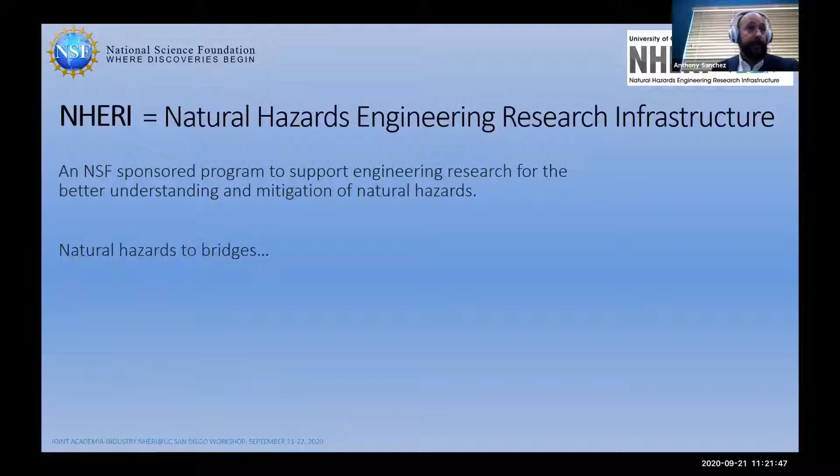What immediately popped into my head was Maurice White. I don't know if many of you know who Maurice White was, but he did some incredible work in the 1970s related to natural hazards. He was with this group called - here he is with his research assistants - he was with this group called Earth, Wind, and Fire, of course. One of my favorite groups. That's meant to be a joke - I understand many of you are probably laughing right now, so that's great.

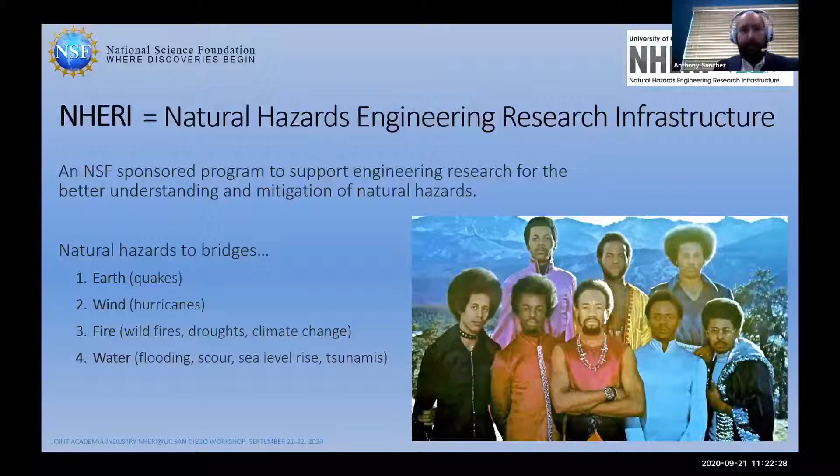I'm going to cover those natural hazards - earth, wind, going to skip fire, but then move along to water. Before we get to the natural hazards, I wanted to talk about the state of the art of bridge engineering technologies to lay the foundation for the talk, starting at the most basic level with the structural forms.

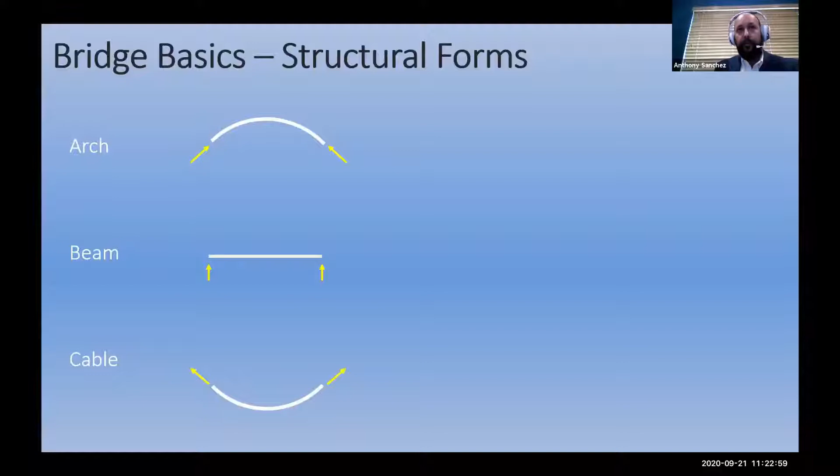In bridge engineering, we use three main structural forms: arches, beams, and cables. These three forms exist in nature - there's an arch, there's a beam, there's a cable. They've also been used for thousands of years by bridge builders, going back to Roman times.

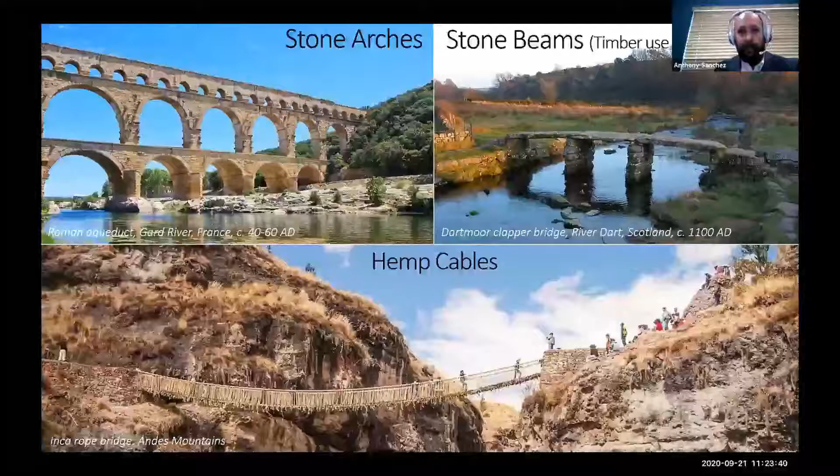There's a Roman aqueduct in France that's still standing today, 2,000 years old. There's a 900-year-old beam bridge in Scotland, a very rudimentary bridge, but it basically exemplifies the form we still use today. And then, of course, the Incas in the Andes have been designing and building cable bridges for millennia.

So let's fast forward about 1,000 years into present times, from about 1970 to present day. I call this the technological revolution of bridge engineering. Advanced computer analysis, high-strength materials, and advanced construction methods have allowed us to design structures like you see here - this is the Millau Viaduct in France, which opened in 2004.

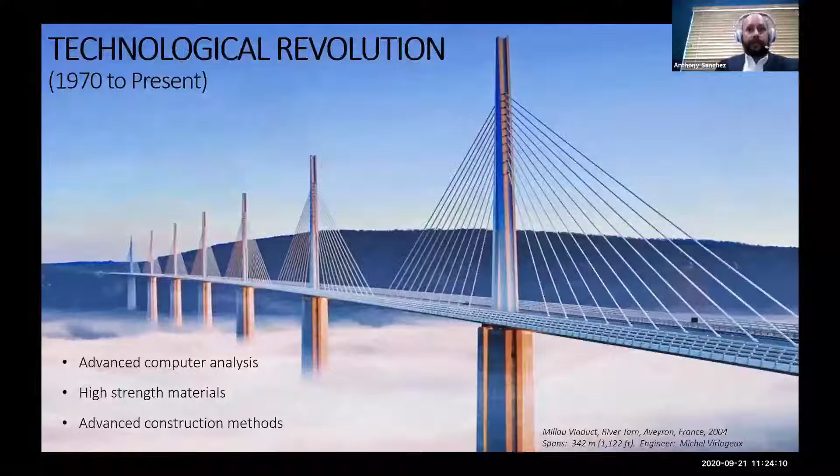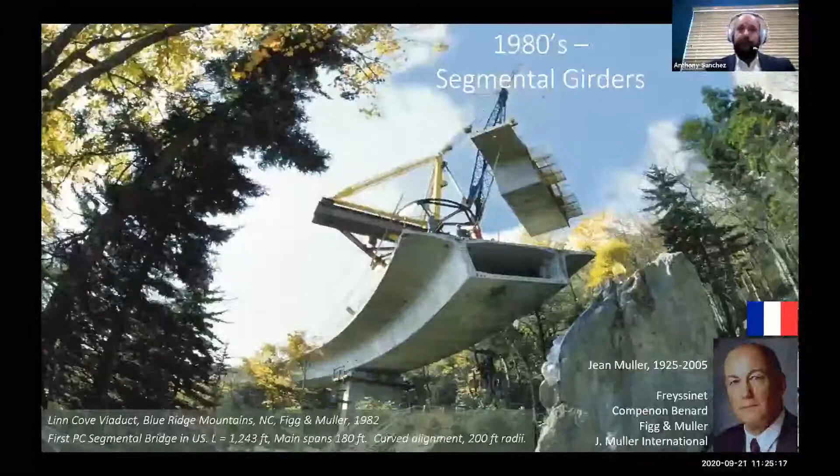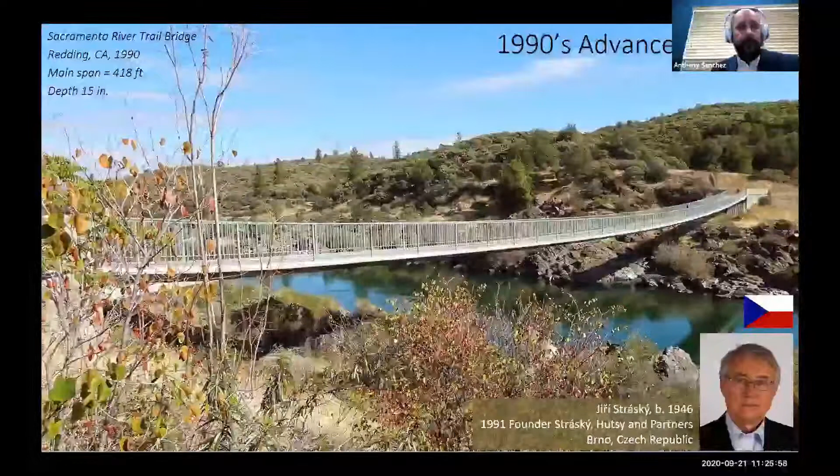That's possible because it works as a cable - it's basically a very flat suspension bridge with the suspension cables embedded in concrete, so you're walking directly on top of the suspension cables. This form was first used in Switzerland in 1967, and then there were a few examples built in Germany.

The stress ribbon bridge was really perfected in the Czech Republic by Jiří Stráský. He's been involved with more than half of the stress ribbon bridges built across the world, in Europe, Japan, USA, Canada, and elsewhere. This one was the first built in North America, in Redding, California, over the Sacramento River. We built 3 of these in San Diego County, and I worked with Jiří on one in San Diego.

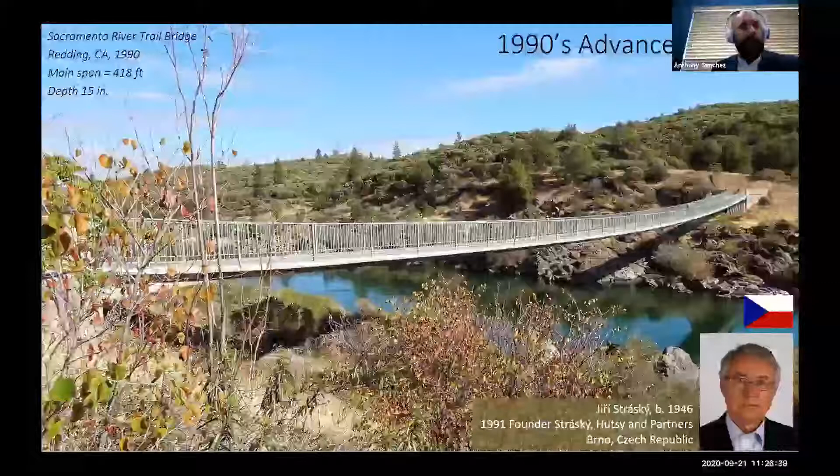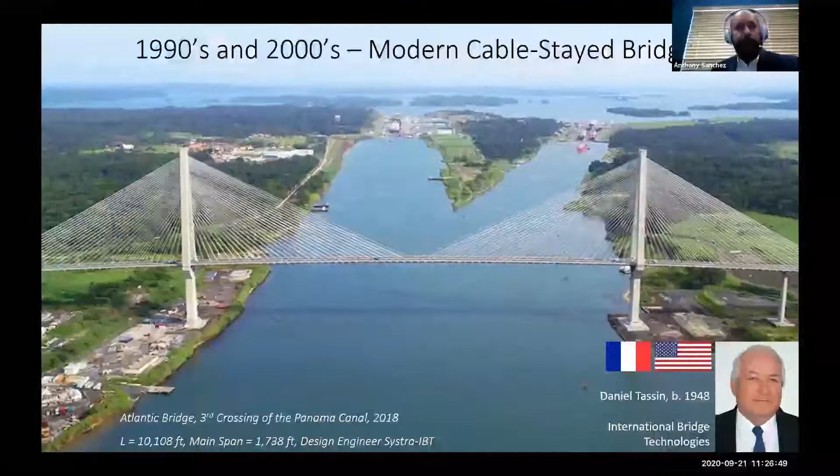Moving on to long span bridges, this is the state of the art as of today for spans up to about 3,000 feet: the cable stay bridge. This happens to be the longest concrete span in the world, with a span of over 1,700 feet between towers. It just opened 2 years ago, as the 3rd crossing of the Panama Canal on the Atlantic side. It was actually designed in San Diego by the firm International Bridge Technologies. There's a picture of Daniel Tassin, who's the chief technical officer of our firm.

Coming back to the US, here's a pretty big arch, a concrete arch over the Colorado River, right next to the Hoover Dam. This one opened in 2010. It's a spandrel arch, which has been used for almost 100 years. The notable feature here is the way it was constructed with advanced construction technology.

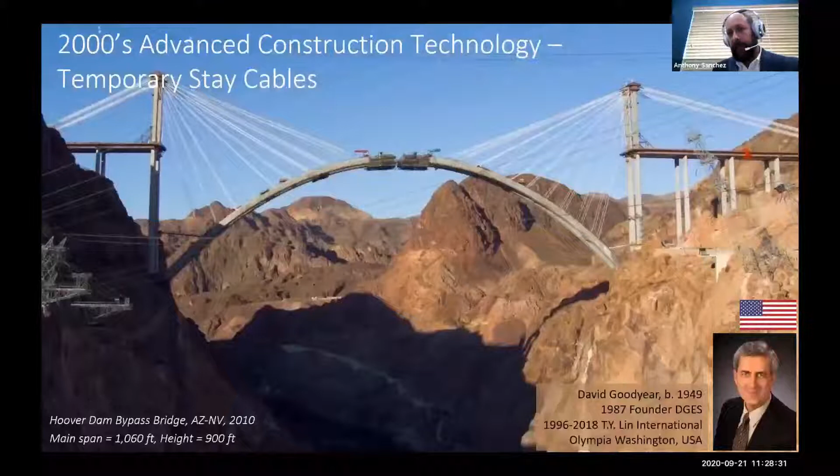Instead of trying to build a support system underneath for the concrete, we designed it so that it can be temporarily suspended from stay cables until the arch was closed at the crown. You can see here they're building the last couple of segments right before they close the arch, and then all those temporary stays can be removed. So construction technology is key - how to build the bridge at sites like this is paramount. This one was designed by T.Y. Lin International, with David Goodyear leading the effort.

I teach the bridge class at UC San Diego, and I like to show this slide to my students. It's a good example of the historical development of long span bridge technology spanning 3 centuries. This is a site in Scotland over the Forth River. That first bridge, the red one in the foreground, was built in 1890. That was state of the art back then - it was actually a world record for several years, the longest span in the world.

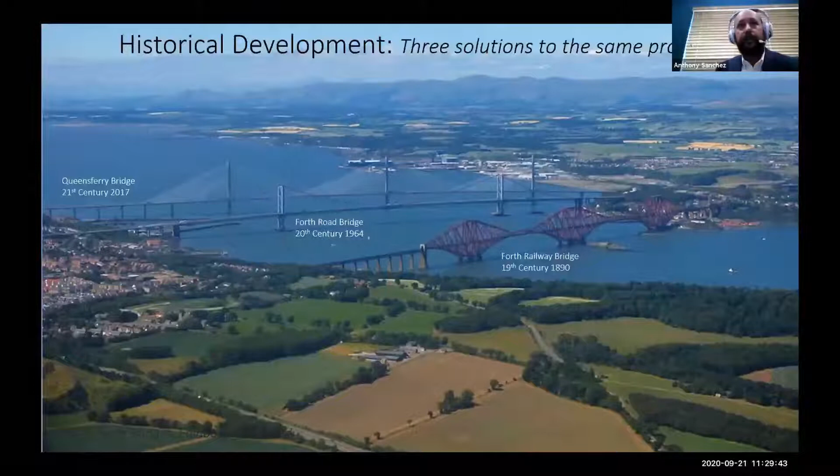About 75 years later, the second crossing was built using 1960s technology, 20th century technology. It's a completely different bridge type - instead of a cantilever or steel truss, it's a suspension bridge using a suspension cable as the main supporting element. Then in 2017, there was a third crossing, this time using the best technology available at the time, once again a cable stay bridge, which is the current state of the art, state of the practice.

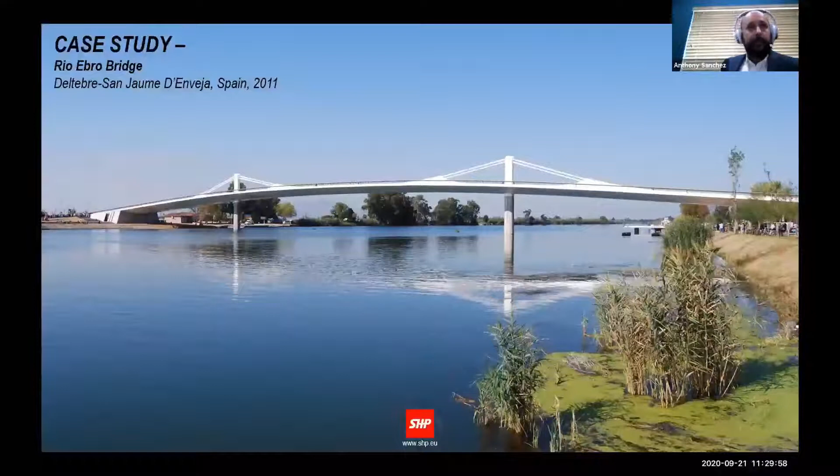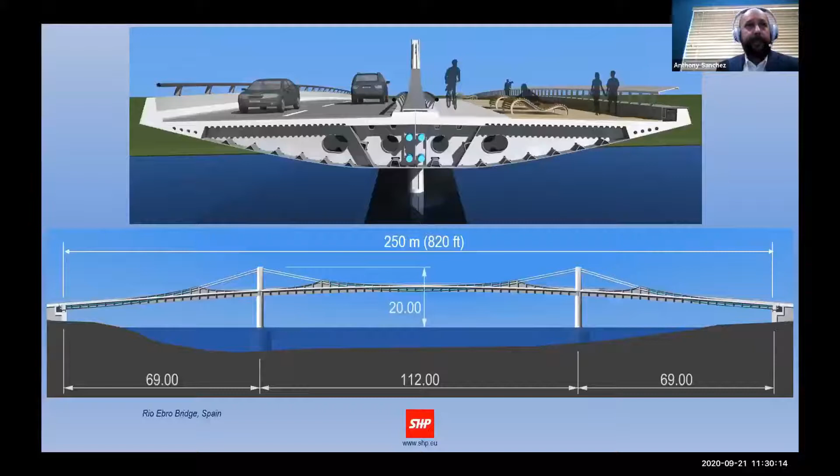Now I'd like to go to Spain and show a few slides on the Rio Ebro Bridge, which opened in 2011. This one is designed by the firm of Stráský, Hutsy and Partners. It's modest in size, 820 feet from abutment to abutment, but it's a very elegant, very sophisticated and technologically advanced design using a steel orthotropic deck to keep the deck very light. The entire bridge is supported by these 4 cables right down the center of the bridge. You can see how they attach and suspend the main span.

Instead of anchoring these cables into the ground as a traditional suspension bridge would do in a heavy concrete anchorage, the main cables are anchored to the deck itself. It's a self-anchored system. So you see how those 4 tendons anchor into the ends of the bridge, and that horizontal force is resisted by compression in the deck.

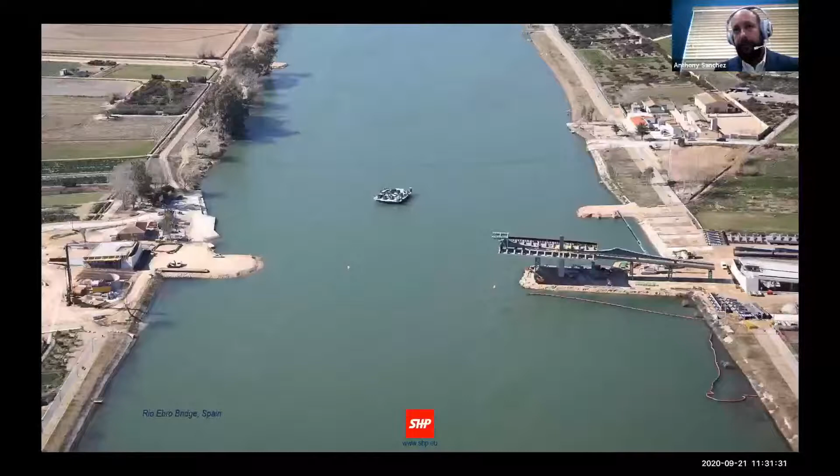For any given site, it's important to understand the feasible ways to build a bridge, and the bridge designer really needs to understand construction to come up with a cost-effective bridge design that can be built cost-effectively. Many times bridge engineers will be working with a contractor to figure out the most economical way to bridge the site. For this particular example, the 2 ends of the bridge, the approach spans and cantilevers, were built with temporary supports on each side of the river.

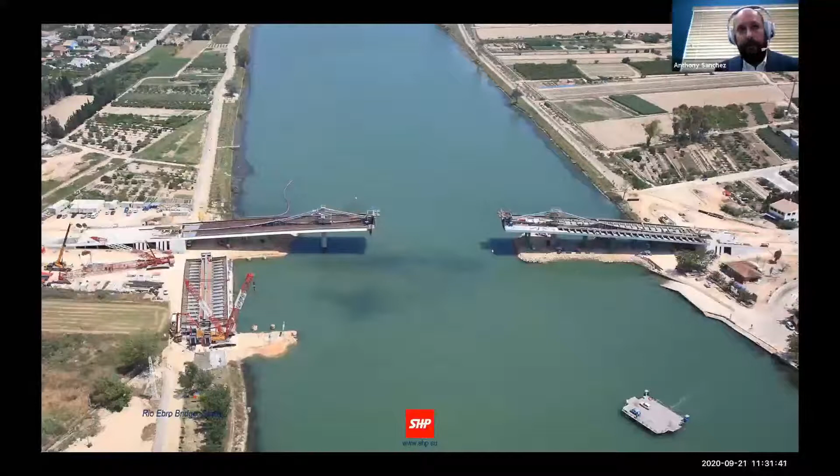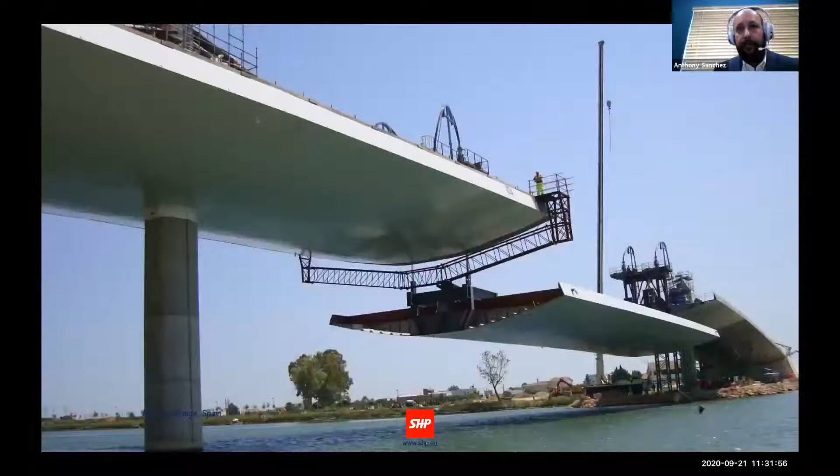You can see the temporary islands that were constructed there. Once the 2 cantilevers were complete, the middle portion of the central span was fabricated and put into the water. It's basically a boat shape, so it floats, and was pushed into location and then pulled up on winches from the 2 cantilevers of the bridge, then spliced, and then the central post-tensioning tendons, the main cables, were tensioned to complete the bridge.

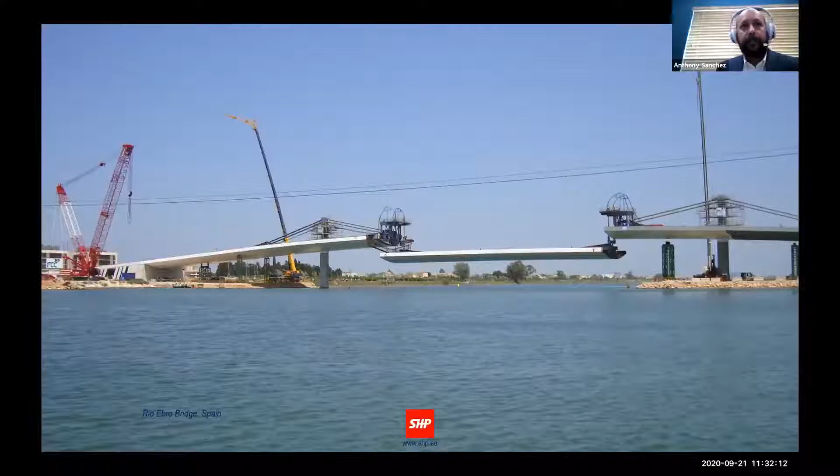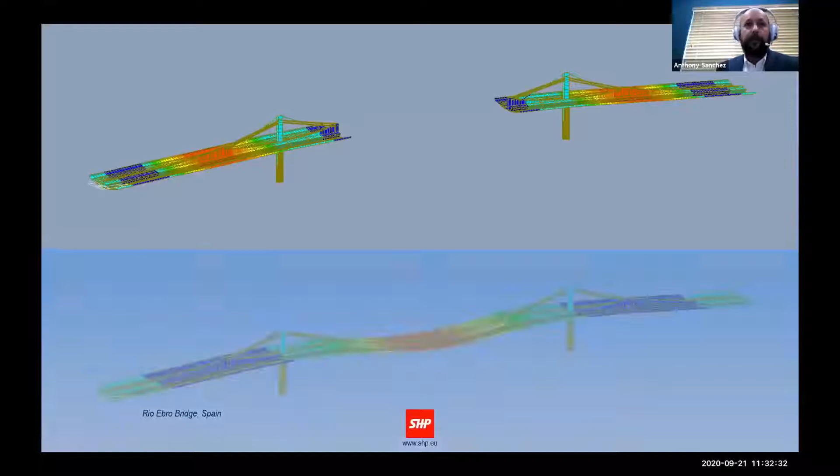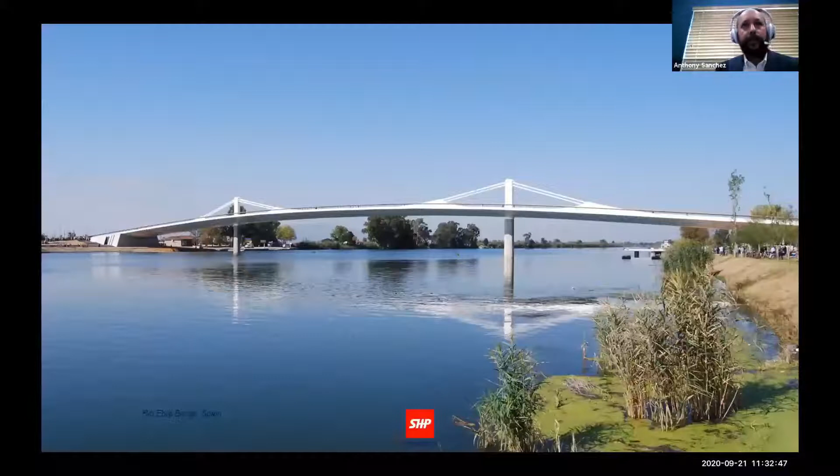As the engineers designing this bridge, we need to develop a good model that captures all the stages of construction, so we're certain they'll all work. Then the completed stage, capturing any locked-in effects from staged construction, and applying all the live loads and other loads that will affect the bridge during its service life, resulting in a completed structure, a very elegant bridge that showcases the state of the practice and technology we have available today.

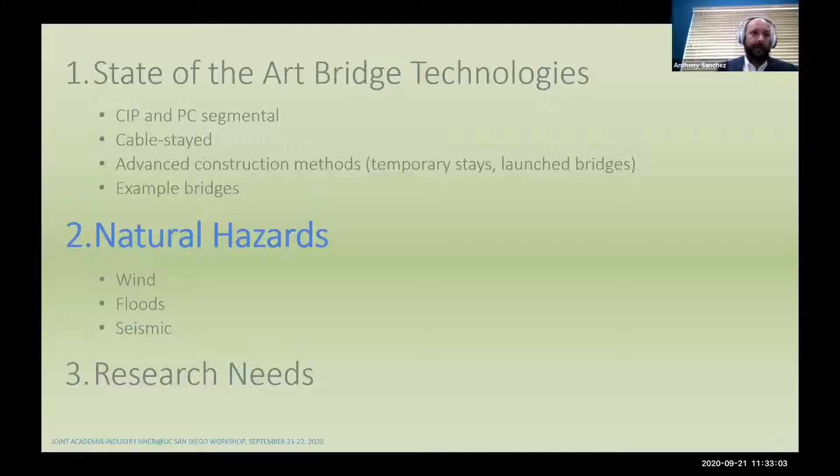Let's move into the second topic, which is natural hazards. That's what this workshop is all about. I'm going to cover wind, floods, and last but not least, seismic.

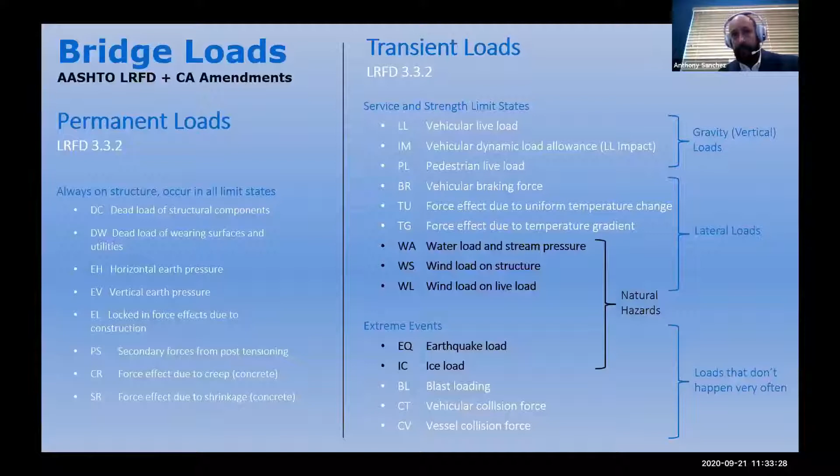In the US, we design our bridges based on the AASHTO LRFD code. Here's a listing of the different loads we design for. Highlighted in black are the loads from natural hazards, including water loads, stream pressure, wind loads, and earthquake loads.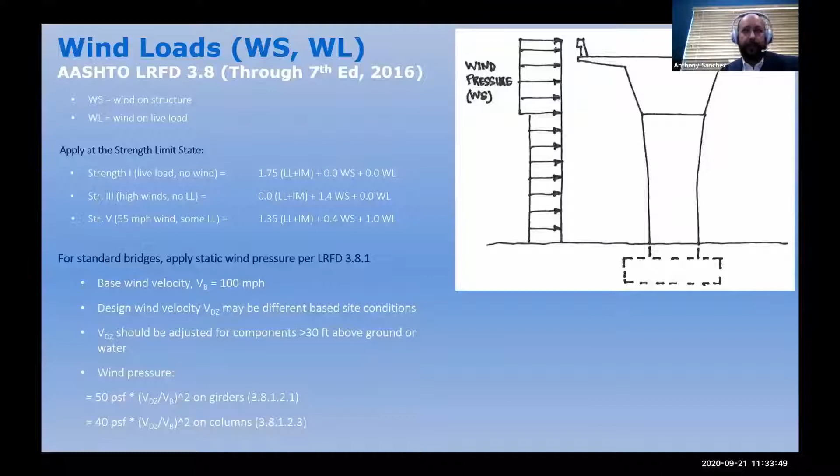For wind loads, on most bridges that are small to moderate in size, we use a very simplified approach, applying static wind pressures, typically about 50 psf on the superstructure and about 40 psf on the substructure. For longer span bridges, that simplified approach is no longer adequate.

As we all well know, many of you remember seeing these videos of the Tacoma Narrows Bridge collapse in 1940. That was before we had a good understanding of how wind affects the response of long span bridges.

This bridge was redesigned and rebuilt about 10 years later, this time using wind tunnel testing and applying aerodynamic theory. It was more of a brute force approach, where a very stiff truss was added to prevent the oscillations of the deck.

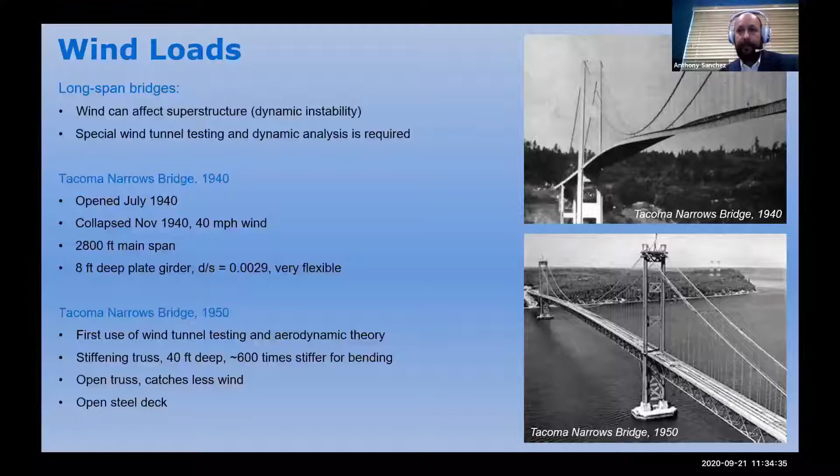Today we have a more elegant approach, with more sophisticated dynamic models and wind tunnel testing, allowing us to reduce the effects of wind by using a more aerodynamic shape for the deck.

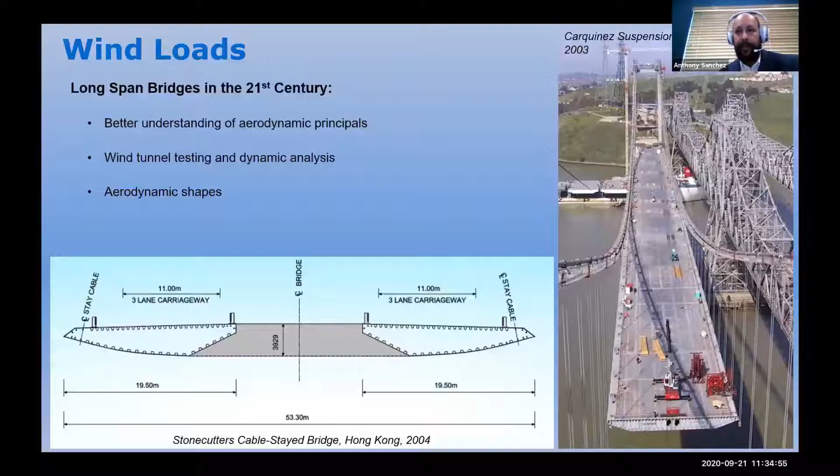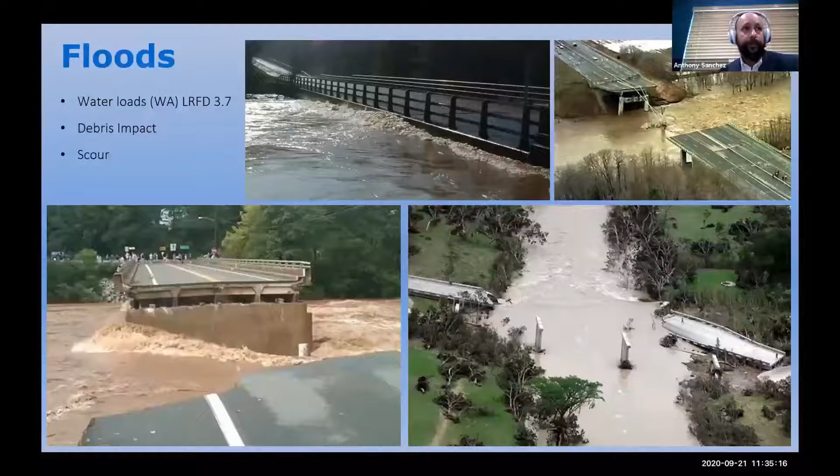Let's move into water loads and floods. Most bridges cross over waterways, rivers, and so forth, so during times of flooding we need to be able to resist these water loads, loads from debris impact, and also the effects of scour.

This is what scour looks like. It's actually the number one cause of bridge failures in the US, more so than seismic. Scour isn't really a loading, but more of a change in boundary conditions, where the foundations may become undermined and unstable.

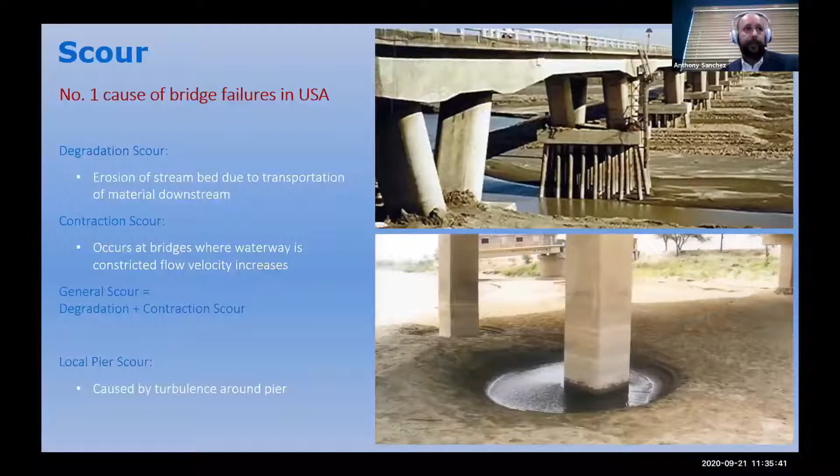Now let's move into earthquakes. In California and other seismic regions of the world, seismic is a very important loading for bridges. It's most likely the largest loading a bridge will ever see, and we need to understand how this works.

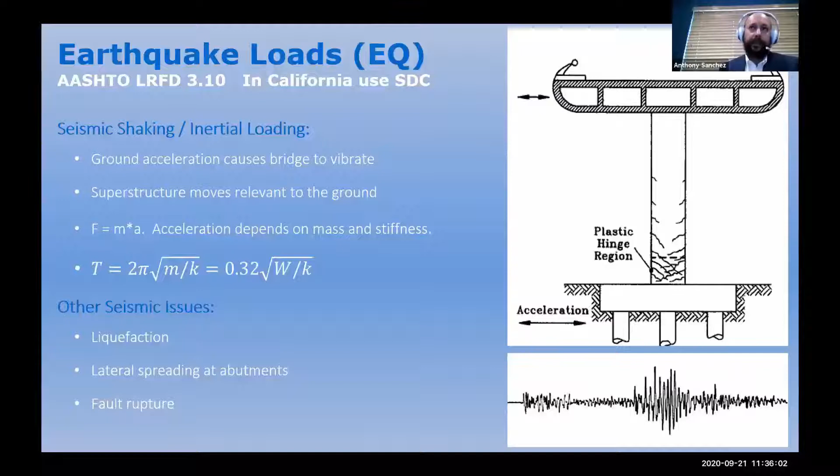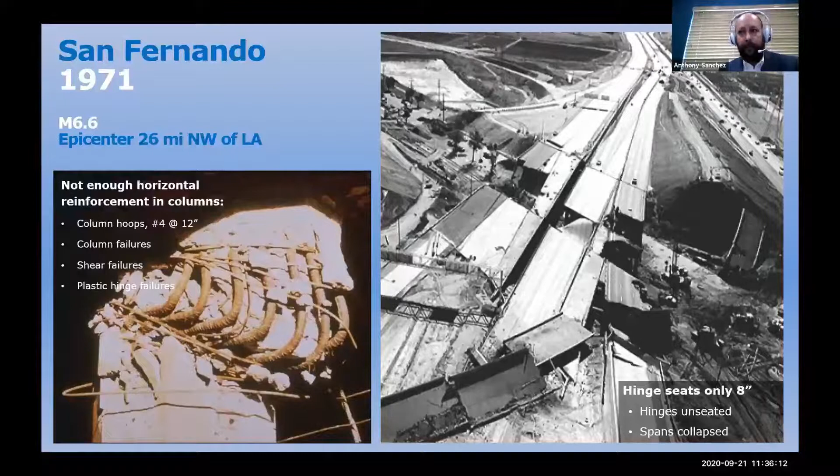In California, we've learned from three major earthquakes: San Fernando in 1971, you can see some of the effects here; Loma Prieta in 1989; and then Northridge in 1994.

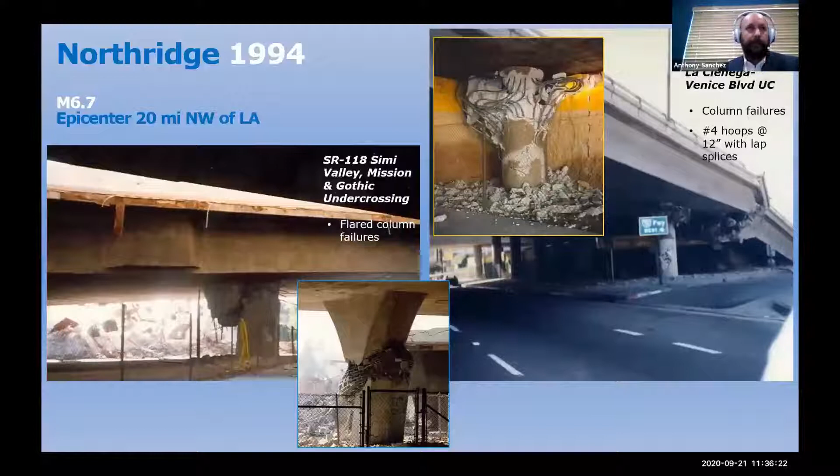What we've learned from these three earthquakes are the three most common failure modes: unseating of expansion joints, where a complete span could collapse because it's unseated; failure of columns due to inadequate horizontal reinforcement to resist shear and provide ductility; and improper detailing of beam-column joints.

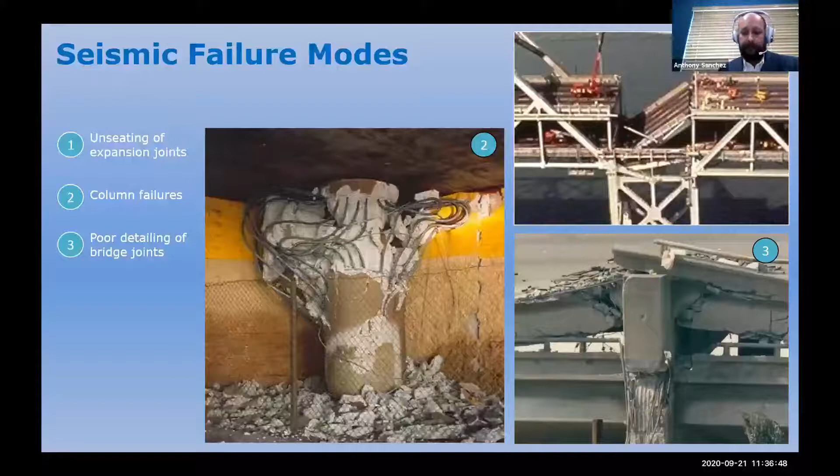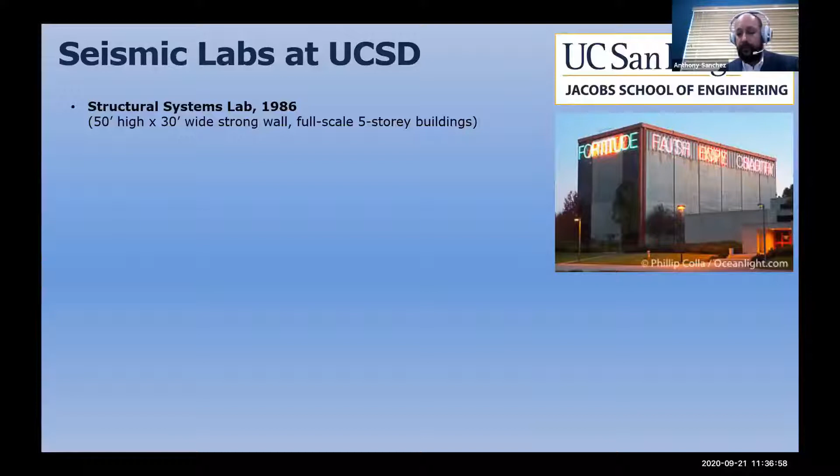So let's go back to UC San Diego. In 1986, the first structures lab was opened, just awaiting some funding for testing. Talk about being at the right place at the right time.

In 1989, the Loma Prieta earthquake hit, generating an influx of funding for seismic testing, followed in 1994 by Northridge, which created a big backlog of testing. A lot of us, myself included, and many of my colleagues got PhDs doing this research.

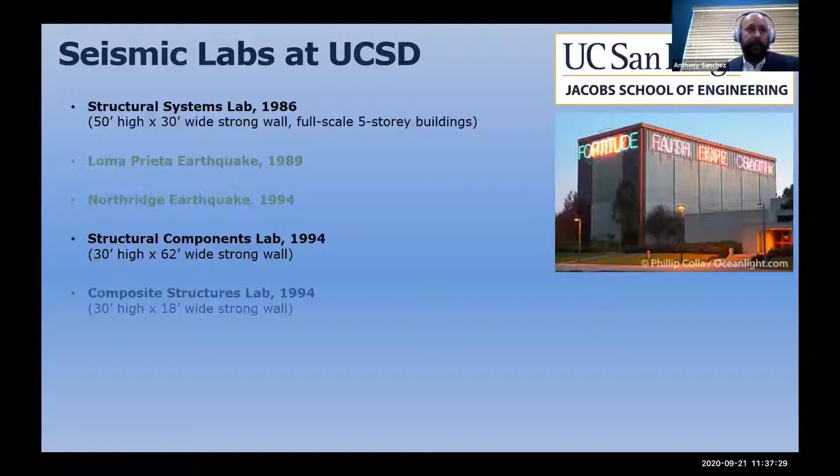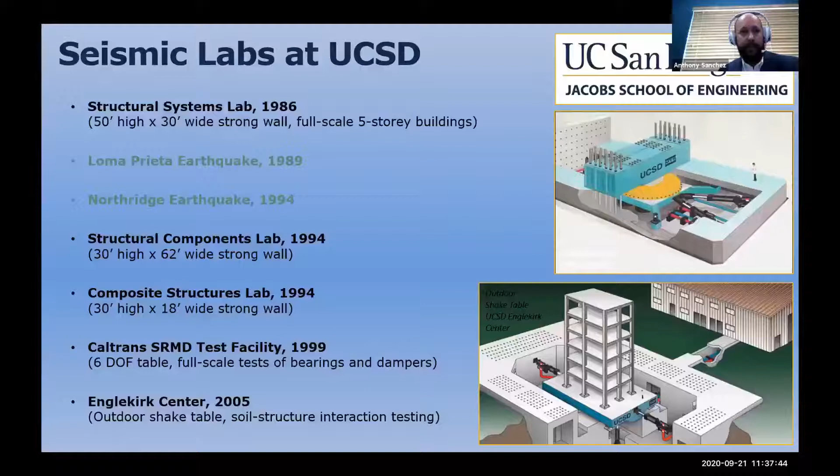In '94 we opened the Structural Components Lab and the Composite Structures Lab, then the SRMD facility in 1999 to test full-scale bridge bearings for many of the toll bridges throughout the state. Then in '05, the Englekirk Center was opened with the outdoor shake table, which is the focus of today's workshop.

I'd like to acknowledge the founders of the Department of Structural Engineering: Gil Hegemier, Frieder Seible, Nigel Priestley, and Enrique Luco. These were the professors who started the department and were instrumental in a lot of the seismic research, which changed the way we do seismic design, not only in California, but around the world.

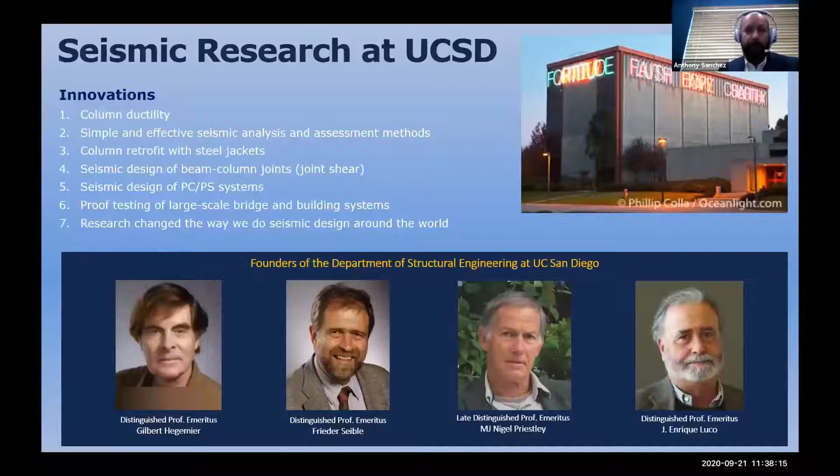We tend to design for larger seismic shaking today than we did 50 years ago. It's a displacement-based approach, utilizing capacity design philosophy.

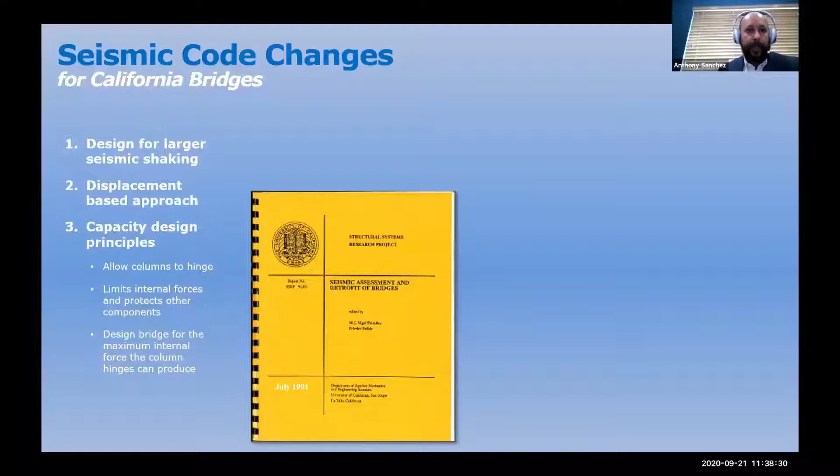The report that came out in 1991 was instrumental in changing the way Caltrans assesses bridges. This worked its way into Memo to Designers 20-4 for retrofitting the bridges throughout the state.

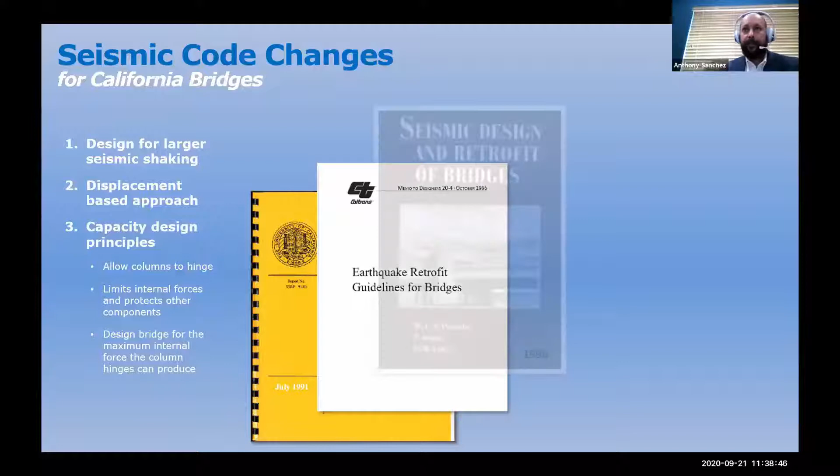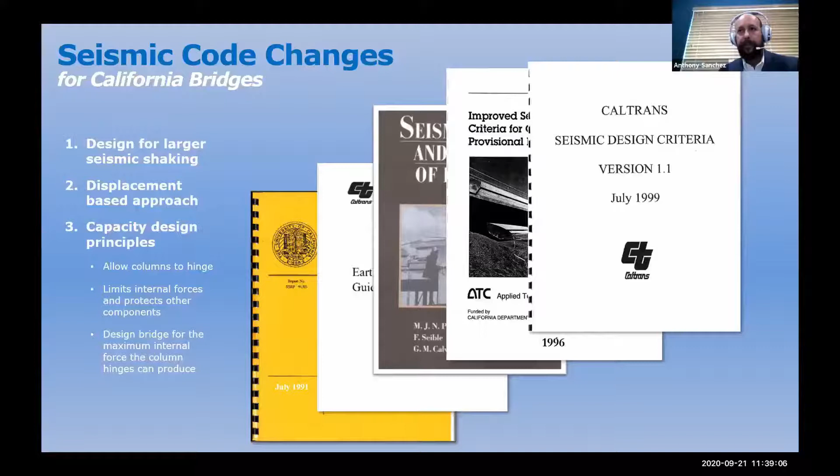This textbook came out in '96, based on this research—the Priestley, Seible, Calvi textbook, seen as the Bible for the seismic design of bridges. Then ATC 32, which turned into the Caltrans Seismic Design Criteria, came out in the late 90s as the first version, and was just updated three years ago to version 2.0, but it's still largely based on the work done in the 80s and 90s at UC San Diego and other research institutions.

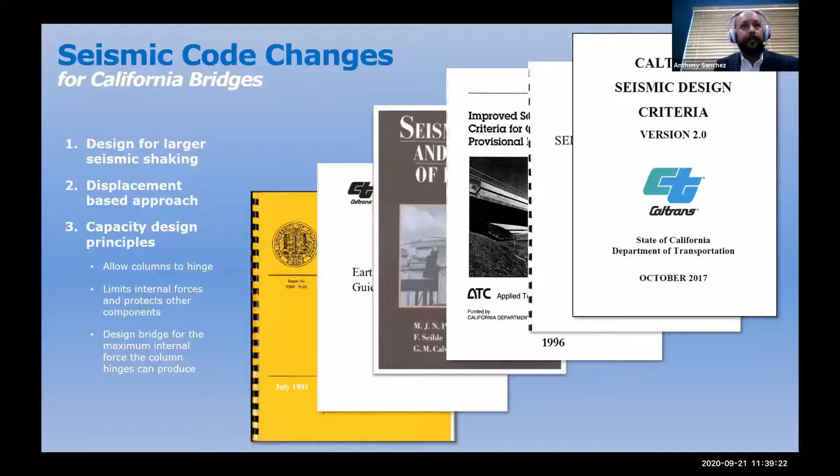We tend to treat ordinary bridges differently than important bridges. Ordinary standard bridges are covered by the SDC, and we rely on ductility. We design for just one design level earthquake, which is roughly a 1,000-year return period.

For important bridges, that could be either a lifeline structure or a major crossing like the Bay Bridge you see here, project-specific design criteria is established, many times with a multi-level approach, where we're looking at small earthquakes where there should be no damage, medium-sized earthquakes where there can be damage but you need to be able to open the bridge immediately after, and then very large earthquakes where we're looking at preventing collapse.

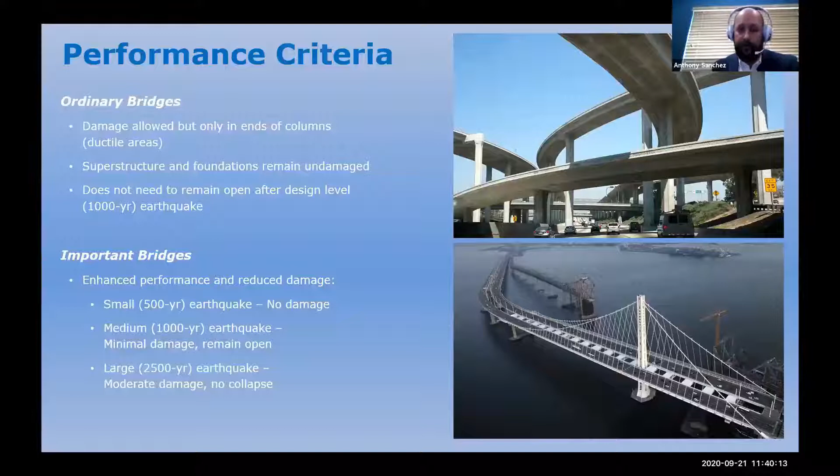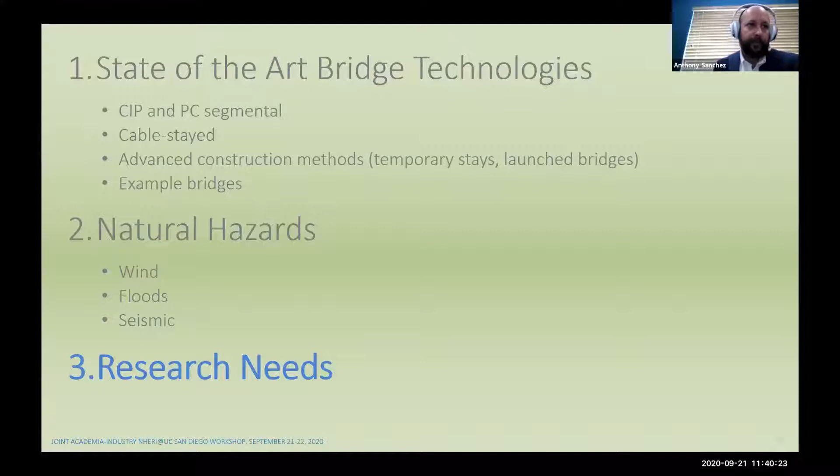Now let's move into the research needs, focusing on wind, floods, and seismic. I reached out to Caltrans a few weeks ago to get a handle on the types of research they're doing, and they sent me some catalogs of recently completed and ongoing research, which I've summarized here.

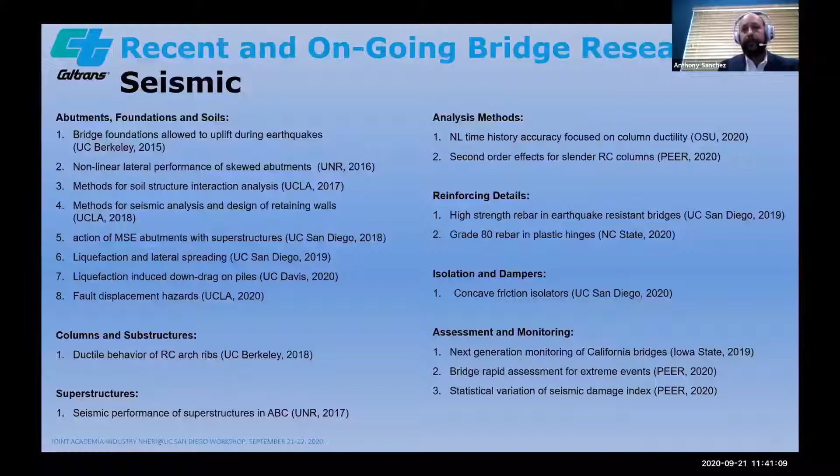Caltrans is still spending about $25 million a year on bridge research, and most of it is still seismic research, looking at the response of abutments, foundations, soil structure interaction, columns and substructures, superstructures, analysis methods, reinforcing details, isolation and dampers, and assessment and monitoring.

They're also looking at other topics, including accelerated bridge construction. This is important now because many of the bridge projects we're doing are in urban areas where we're widening or replacing a bridge over traffic, and it's important to get in and get out quickly so we're not disrupting traffic for years on end. So ABC is an important topic.

Some of this ABC research is related to seismic, to make sure we can get good seismic performance out of these precast systems, looking at pre-stressed precast girders, bridge decks, and other effects.

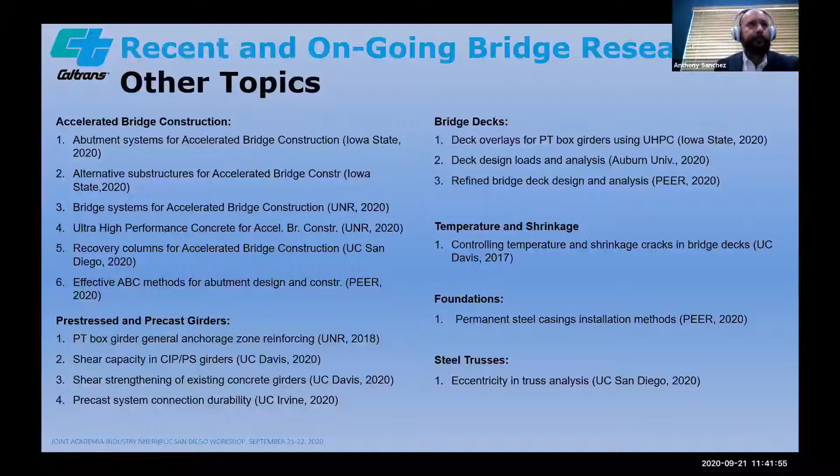Going back to flood hazards and scour, I see this as a potential research topic. It's not really a structural issue, it's more of a topic for our colleagues in hydraulic engineering. But if we can develop better ways to reliably assess scour, many times the current tools provide scour depths that I believe are unrealistically large. A better way to assess scour depths could save money in construction of new bridges. Also, ways to reduce scour with more streamlined pier shapes and other hydraulic devices.

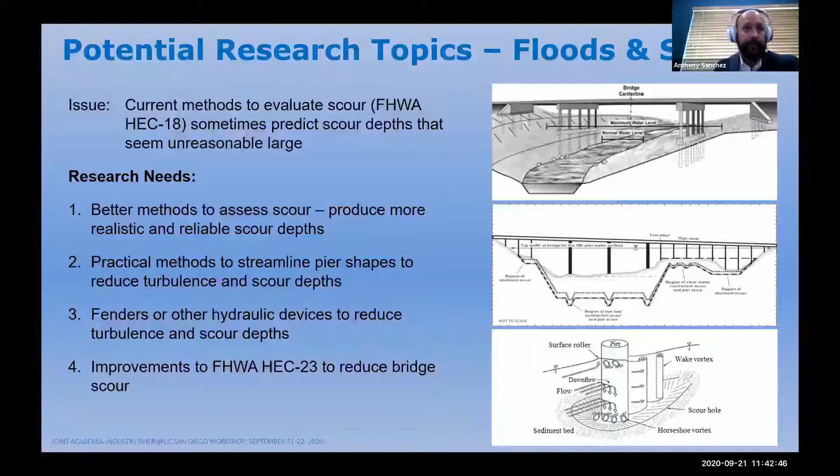Moving into structural engineering and concrete, creep drives the design of our cantilever bridges, our segmentally constructed cantilever bridges, where they begin as cantilevers and then turn into continuous beams once we close the midspan, and then creep takes over. AASHTO and ACI don't adequately address the way creep works. It can be unrealistic and many times unconservative.

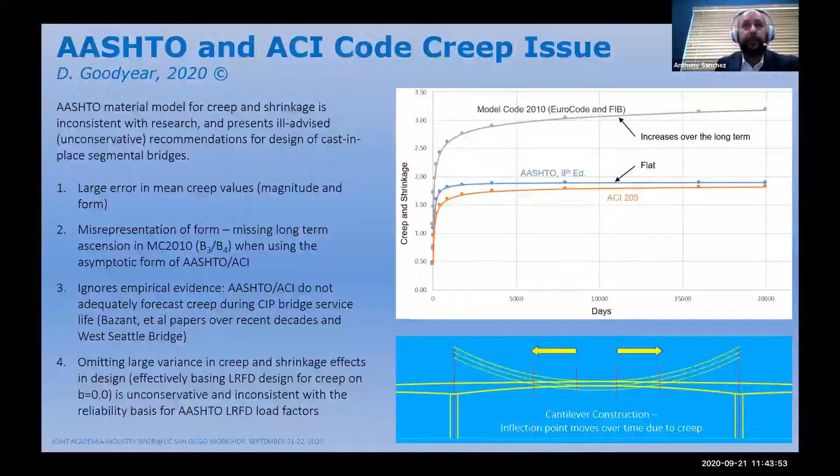For seismic, the trend in current codes is to use ductility, which is a good economical way to design our bridges for collapse prevention and to save lives. The downside is that many of these bridges will be damaged beyond repair after a big earthquake, meaning we may have to go in and replace a lot of damaged bridges, even though they performed well to current standards. We could do better if we start to investigate ways to prevent damage with elastic systems.

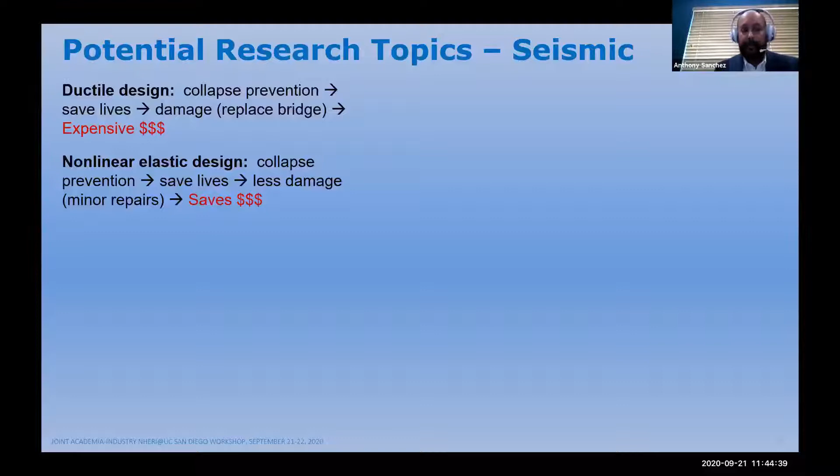That can be either foundation rocking, where we allow foundations to rock to reduce structural damage - that's a potential area of research using the new shake table - and also using unbonded pre-stress tendons in columns so that we have less damage after an earthquake.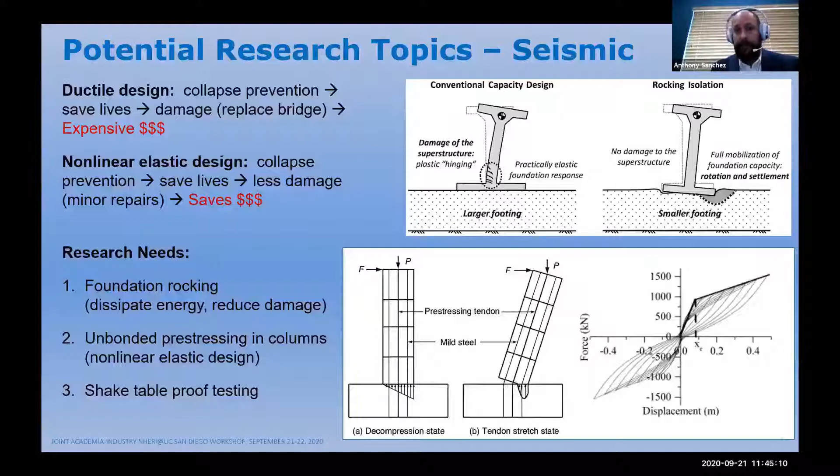These systems self-center and reduce damage. Here's a slide that Professor Restrepo shared with me showing a two-column bent that they tested with unbonded tendons, and it performed very well, self-centered, with very minimal damage after a big earthquake. So these are the systems I'm talking about that I think are the next generation of seismic design.

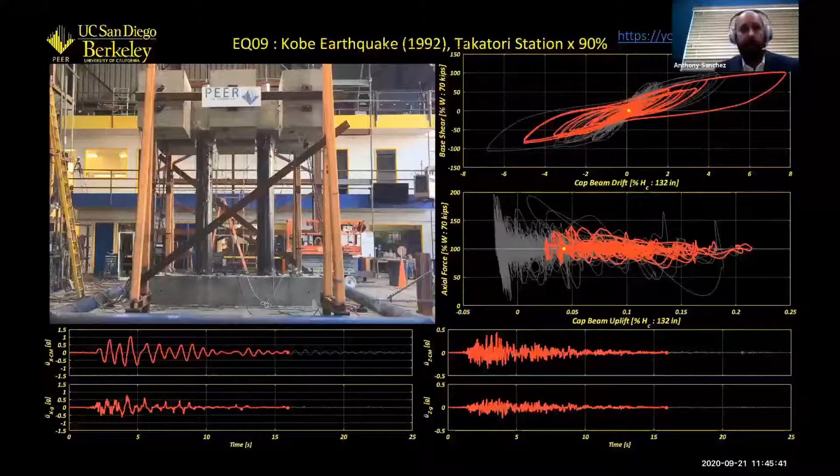We need to do more research to prove that these systems are reliable and robust, will work well, and can be implemented in the field. We'd also like to address reliability and robustness in terms of bridges overall.

Moving on to the FIU bridge, which was a non-redundant concrete truss that collapsed in 2018 while under construction. The cause was poor detailing of a joint. That one is still under investigation.

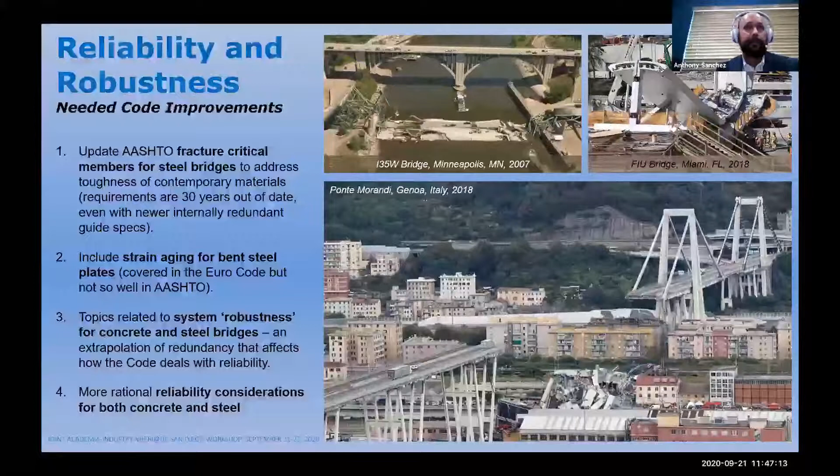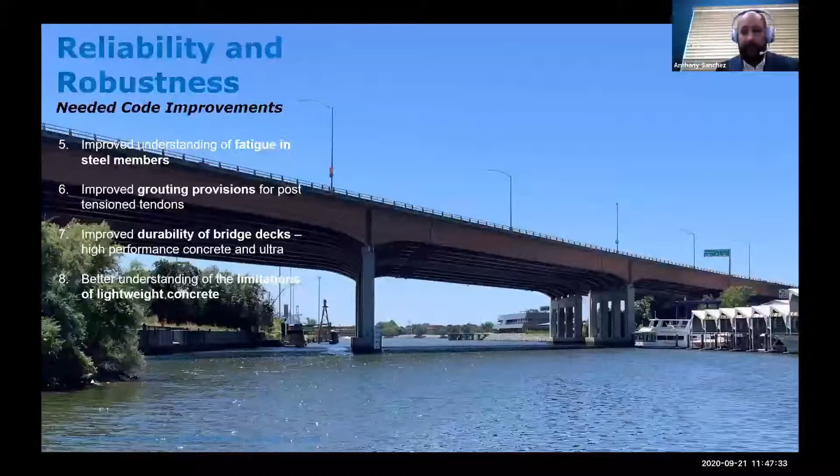But reliability and robustness also deals with durability and maintenance. Here's an example bridge in Stockton, built in 1972, that most likely needs to be replaced. It's not in danger of collapsing, but it's become a maintenance issue. This is a state-owned bridge that Caltrans is spending millions of dollars each year patching the deck.

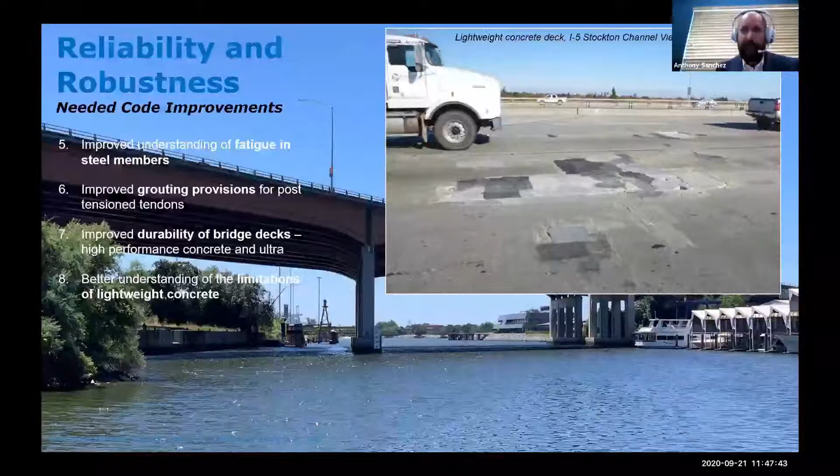What led to this poor performance has to do with fatigue of steel. It's a steel girder bridge, braced with pipe braces. After many cycles—the bridge is 48 years old—about 10 years ago they started to see fatigue cracks in the braces, where some of them just completely failed, leading to more flexibility in the girders.

So the deck is deflecting more, and it's a lightweight concrete deck, which is prone to spalling. So the deck is spalling and cracking, and for Caltrans it's just turned into a money pit in terms of maintenance. Some other potential research topics deal with fatigue and durability of bridge decks, and also understanding when to use lightweight concrete. Those are some potential research topics on the bridge side.

So with that, I'd like to go ahead and stop and thank you for your time. And if we have time, I can answer some questions.

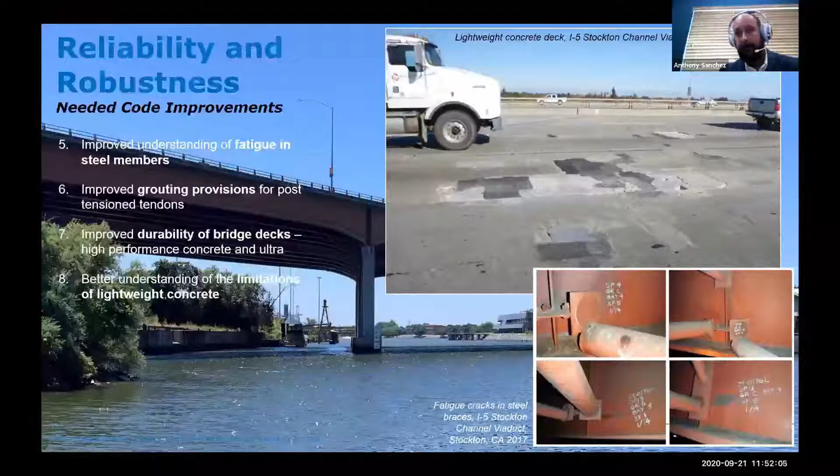Well, this is what the topic of this slide is. There's a lot of old bridges starting to see deterioration, mainly in the decks. The decks get beat up because you have heavy loads driving on them. There are needed deck replacements or overlays. Some of these present challenges, especially if it's a post-tension bridge where the deck is part of what's resisting compression loads from post-tensioning—so how do you replace a deck on a post-tension box girder bridge? I think advancing the technology in terms of how to repair bridge decks, with overlays and advanced materials, there's a lot of room there for research to come up with ways to repair these aging bridges.